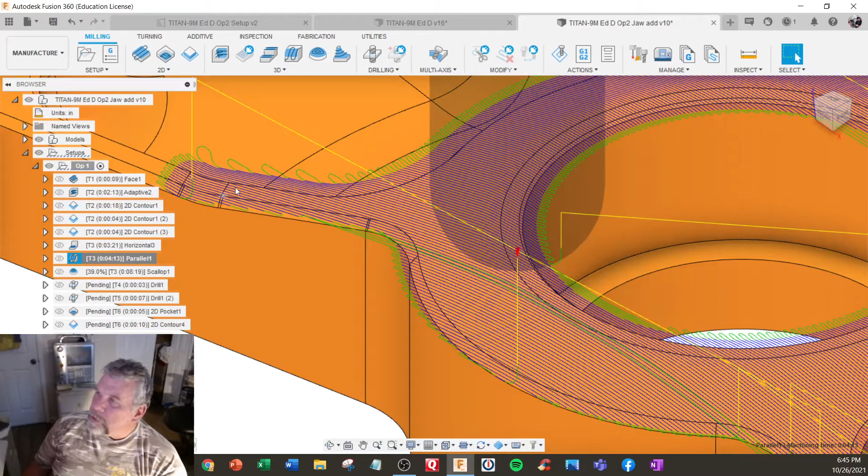Fine, but that all work. And now we're down to 4 minutes.

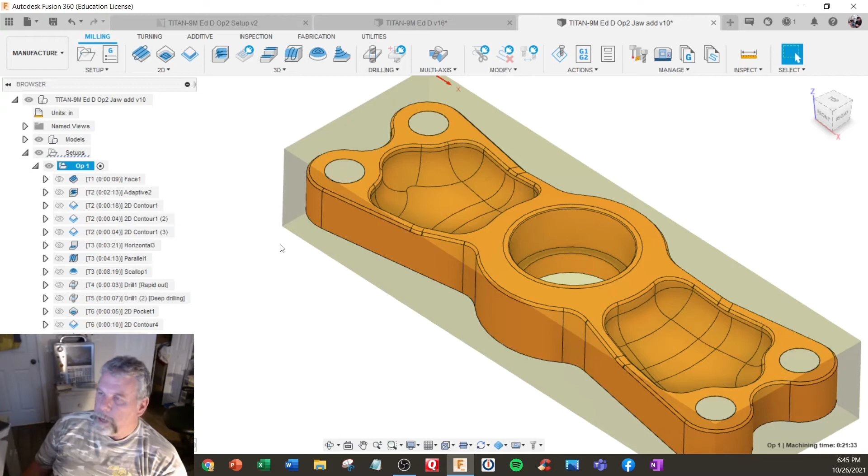On the scalloping, which is in the internal of the sculpted area, I already increased the feed rates, but on this one I already did the 10 thousandths step over. So it's going to be a matter of how the finish looks at that point. But total machining time is 21:33. So we're always trying to look at those because these could be more time consuming. We're also using trace, in the chamfering mode.

So in here, and this is also going to become important in the Titan 10M. So trace, and with the chamfer turned on, 0, and make sure you get the left compensation on that. All right.

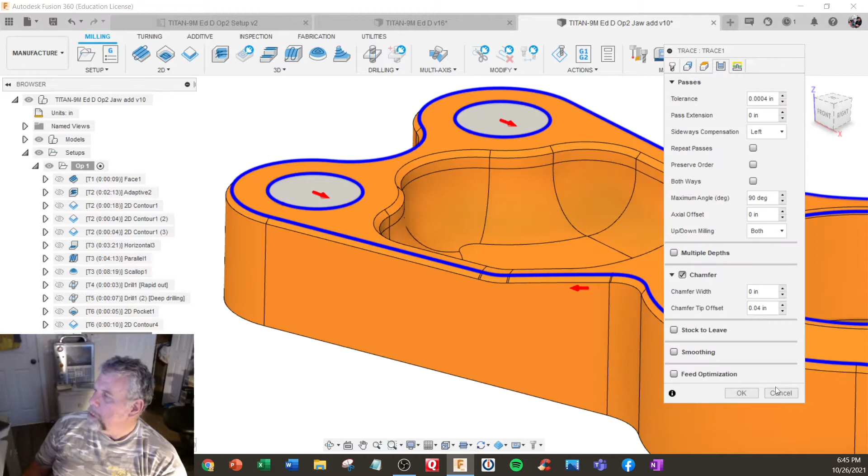Now we can go to operation 2 and use the reset new stock setting on here. So we go up here from preceding, hit OK, and yes.

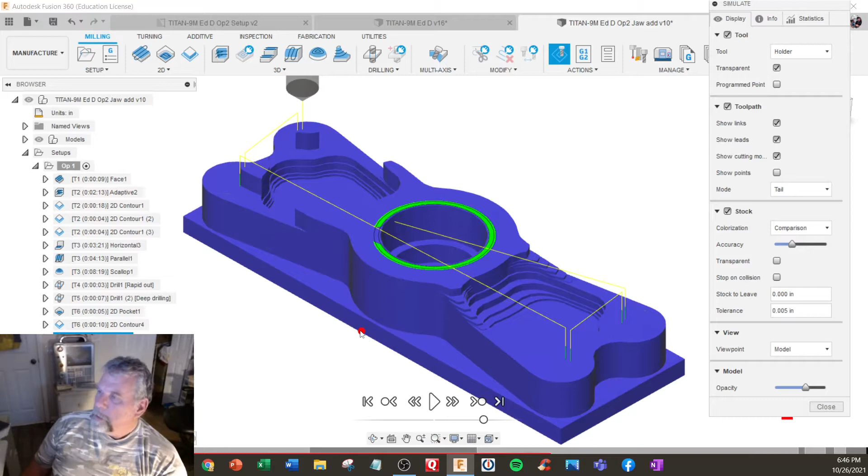I think we're still having a regeneration problem. So let me go back to an older way of doing it, which would be simulate, go to the end, let it generate. This takes a second. Now that I turned all these things down, I didn't have to be as accurate.

And almost done. When I see the holes, I know I'm at the end. Okay, so in here I'm going to do save stock, and it's going to save it as an STL file.

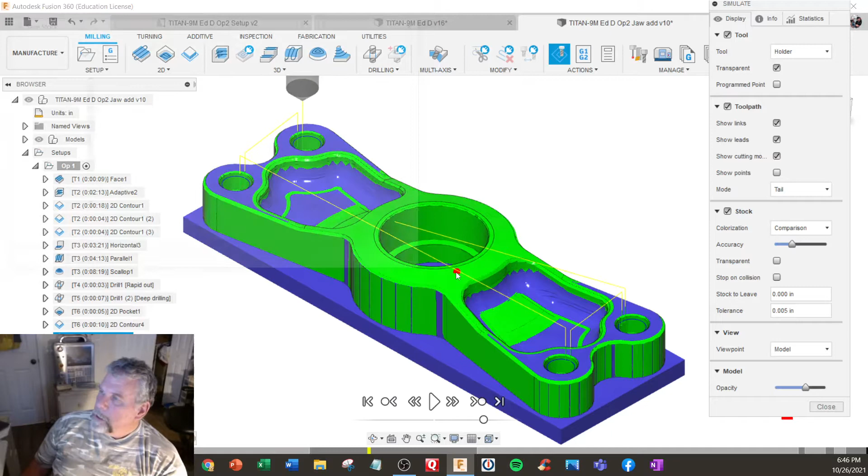I'm just going to put it on my desktop for now. Hit save. Close.

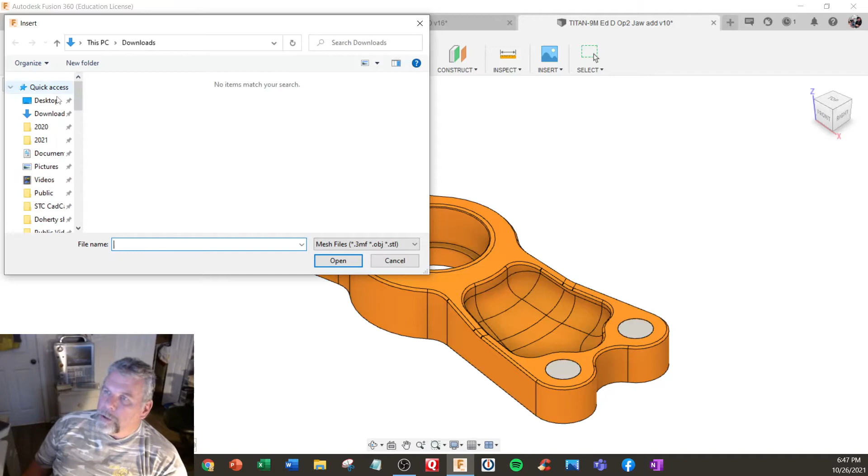And I'm going to go to the design side. Let me turn off these soft jaws, right? I'm going to insert mesh right here, and I'm going to go get that material, stock, right there, and I'm going to open it up.

Notice it's exactly the same shape. I'm importing it as inch, but let me shut it off because sometimes we have a problem with that. See how it's shrunk? So if we're working in inch, you got to import it as millimeters so it matches the size. Let me make sure I am doing this correctly.

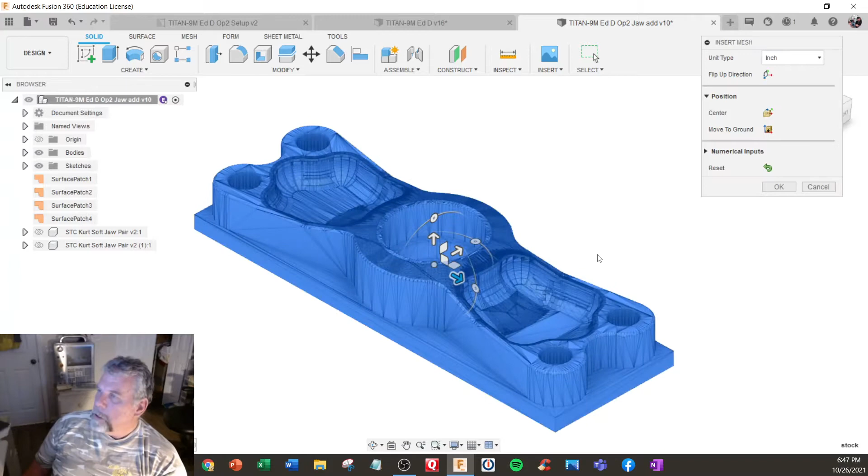Let me try this again. Insert mesh, stock, open. There it is, and that looks like the right size. I'm going to hit OK, and we turn the body on and off.

So that is now, let's see now. Oh, body 1 is, let's shut the stock off. Yeah, see how it's reduced size? So that's the problem with that. It's

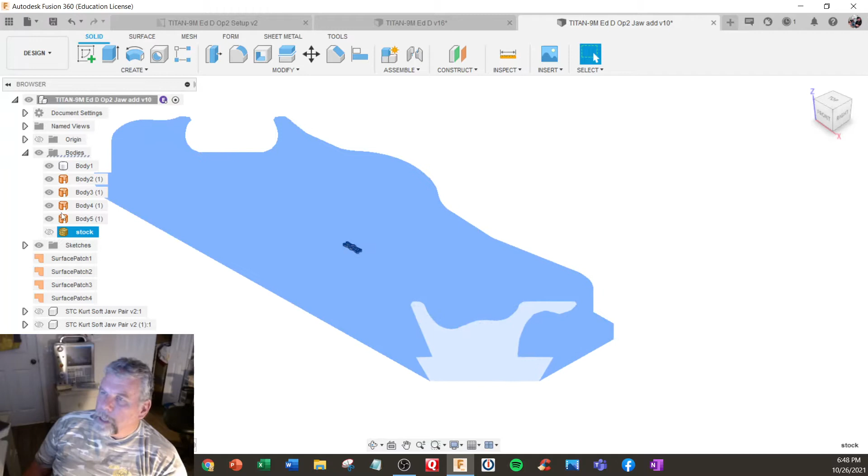not scaling correctly. I'm going to delete that one. Body, I'm going to just double click to zoom it up again. Insert mesh, get to stock again. Hit open.

And now if I turn this off, I notice how small that is. So I'm going to go to millimeter. Hit OK, and now turn on the stock. So that's actually, I don't think it's doing it correctly. Hold on. Okay, I finally got it to come in right.

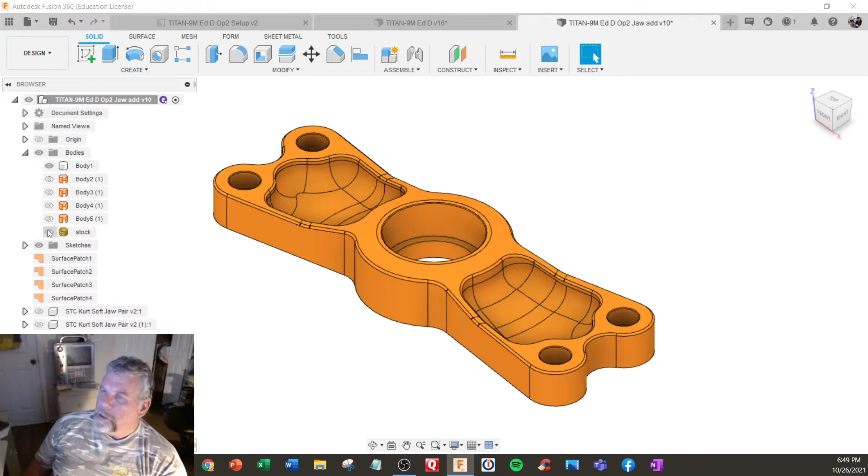So this is the original. This is what was machined. If I turn the body away, this is an STL, a stereolithography file of what is remaining. I'll turn everything back on.

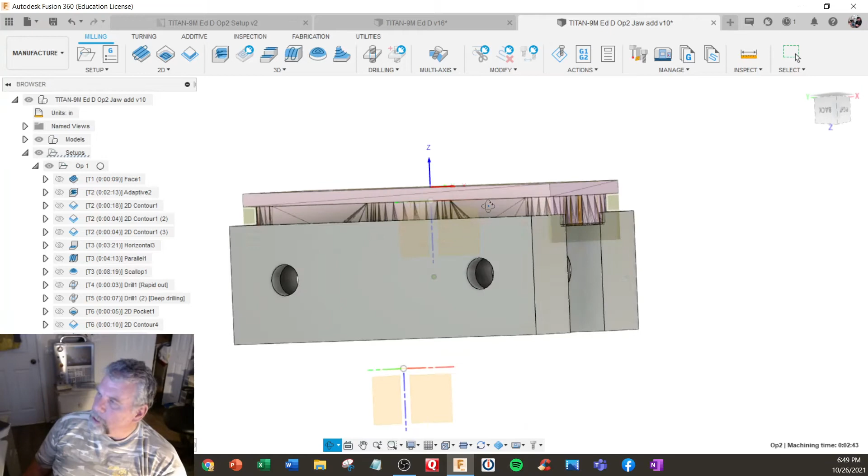I'll go back to manufacture. I'm going to go to operation 2 with the jaws, and notice it's exactly what it would look like. So I'm going to use that as my stock.

Edit stock, and instead of the preceding, I'm going to use from solid. Actually, I can just select that, or go in here and select the stock. All right, so that's identified that as our material exactly.

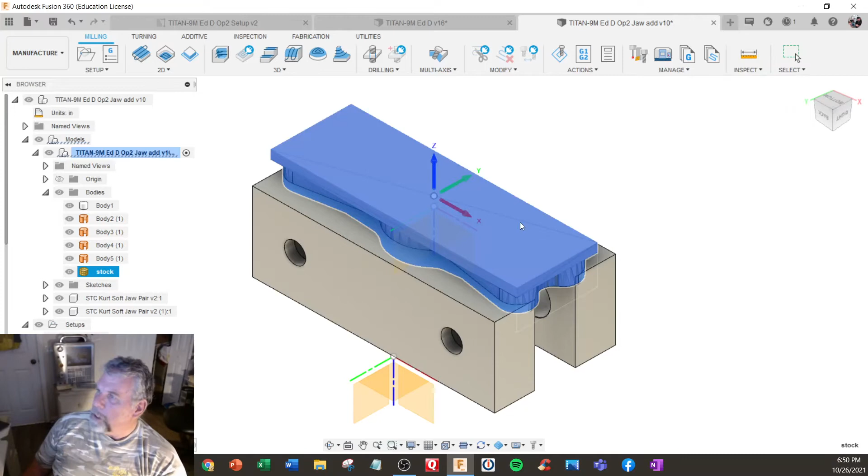I'm going to turn on operation 1 and shrink all these up. I'm going to regenerate this one. Make sure this comes out correct. All right.

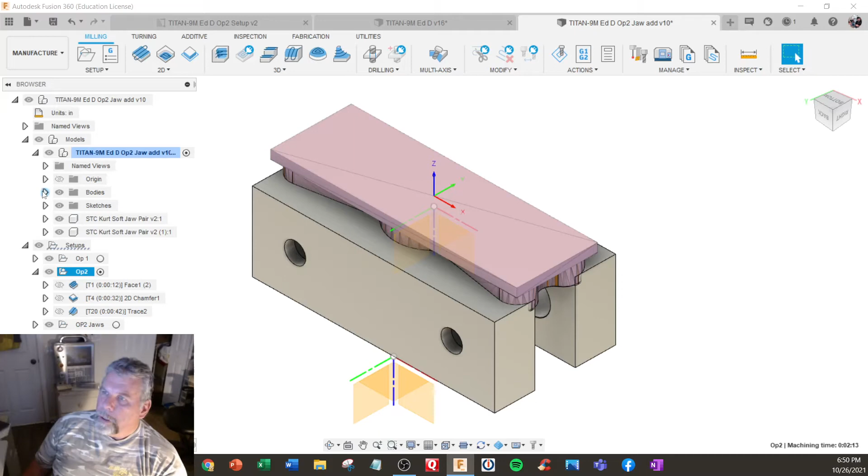Now I can actually turn that off, because this is going to be our material. Yep, looks correct. Crank that up, and we go simulate, right?

All right, we're on, let's see now, close. Operation 2 is selected. And now we can hit play. Hopefully. Close, try it again.

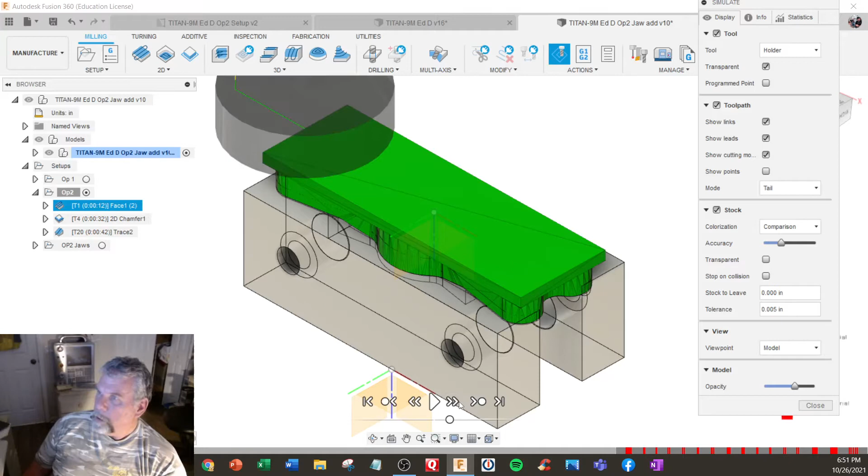We just go one move at a time. There we go, all right, first cut. Oh, that does not have multi, and we're set to the wrong location. Oh, I'm glad this, right? Let me shut off that material there.

And our 0 wants to be right on the top of this surface. So I'm going to redo my setup here. Edit to setup.

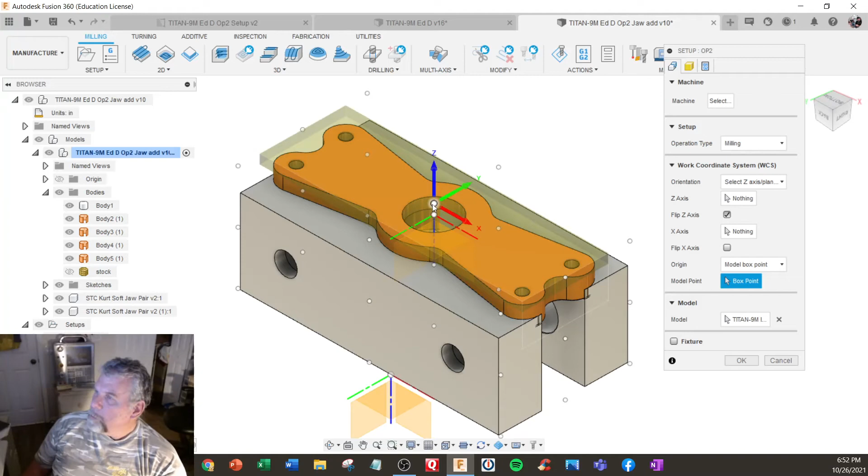Turn that stock model off. And I want to select model box point. You got to be model aligned on second operation. And I'm trying to move it from here to there. If that won't work, I'll use model origin. There we go.

Now it's totally aligned, that coordinate. Okay, I'm going to regenerate. Regenerate. Turn off that STL file.

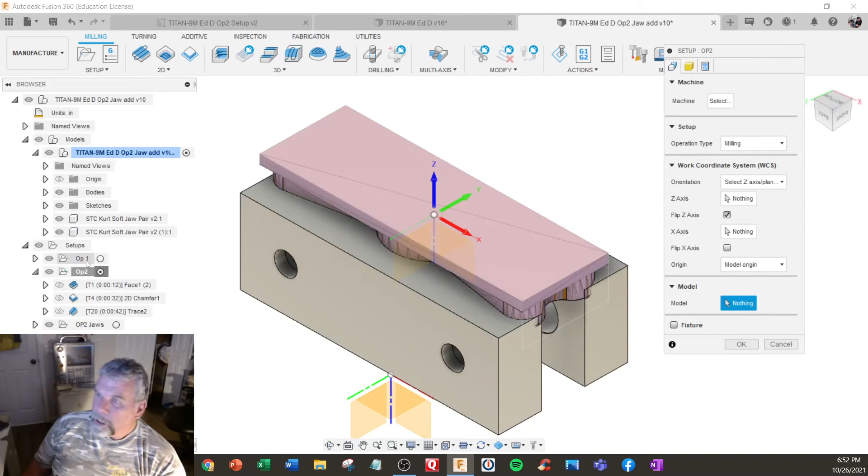And go to, I just want to edit this operation. It knows which is which. So I'm going to unselect and select the model underneath, which would be this. And hit OK. Okay, now we're all done.

I'm going to regenerate. Takes a second, and then we're going to machine. So it's simulate, right? There we go, there's our little blue hat on there. And press play.

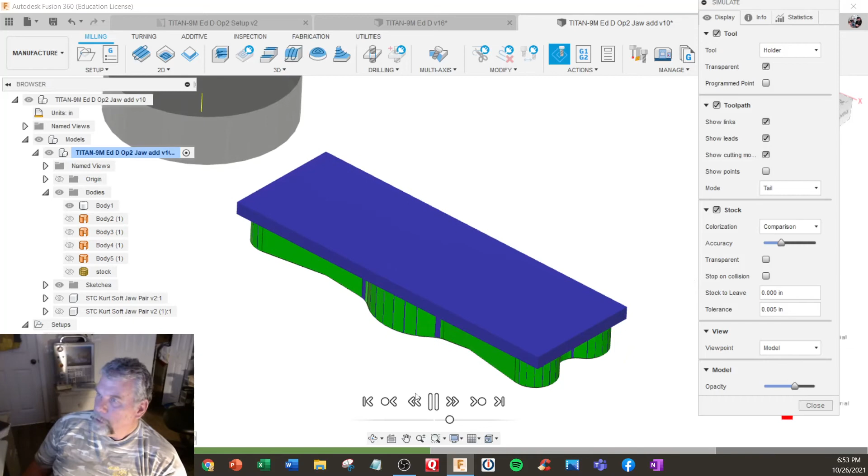And there's our tools. There it is. All right, I'm going to speed it up a little bit. There we go, cutting its way down. And we're going to chamfer, and I've actually added engraving right there.

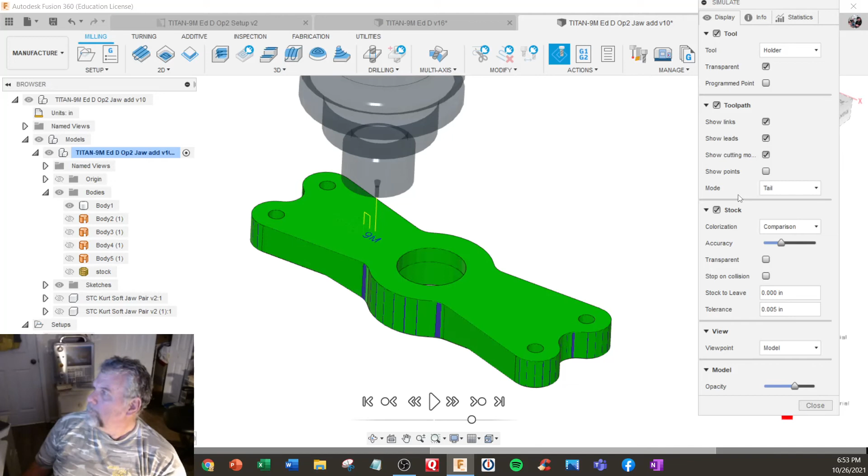Okay, let me turn on the, let's see, view model. I'm actually going to go into setup and turn on this OP2 Jaws. With simulation, I'm going to pick this jaw and that jaw. I'm going to make them visible in it. Okay, now they're going to be part of the simulation process.

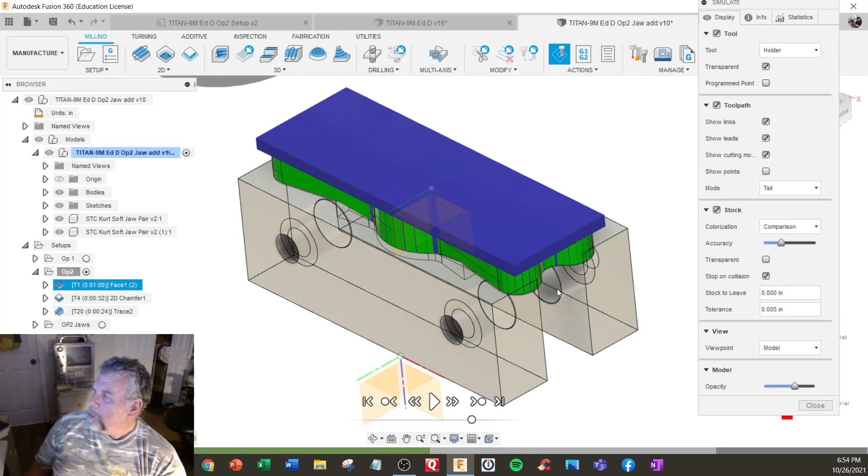And on simulate this time, I'm going to turn on stop on collision. So in case we come close to the jaws, it'll stop. All right, press play. All right, all looks good. This is exactly what's going to happen.

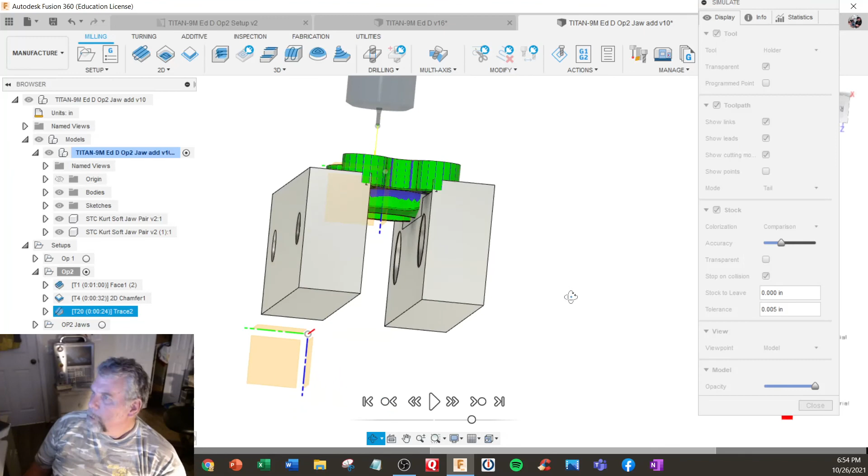So even the model of these jaws, you can change how that looks, kind of like it to look like original. So right there, these are our real setup. And notice right here, not touching here. We're only sitting on that surface.

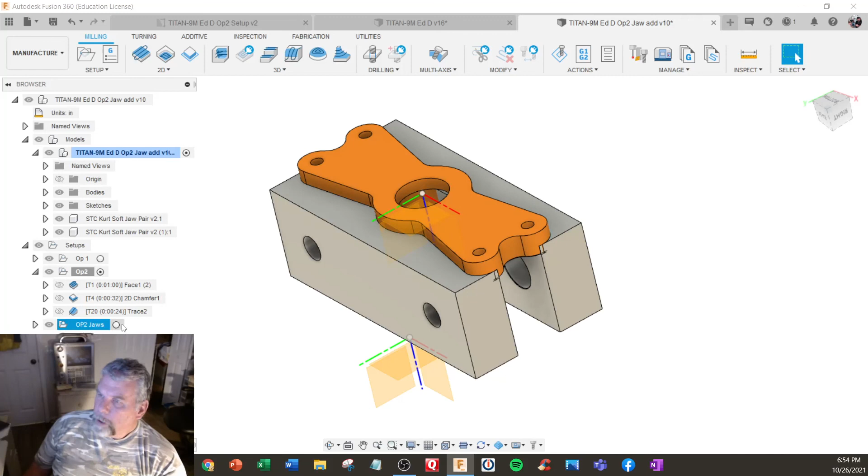Close. Okay, that pretty much wraps it up for this one. This took a little while, but we learned some stuff. We got the active sync view setup. In Operation 2, how to make the jaws, which we projected a profile. We had to do these little steps in here manually.

Where do we put these surfaces? And we just made sure this was below and not touching. We literally have the part in there. We can see that a lot better.

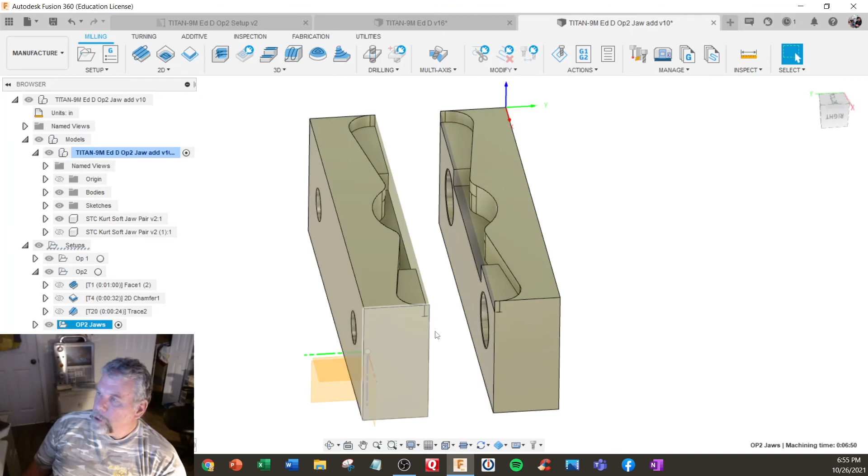And we got to know the space to put in between there. So you either simulate the space or measure in between and put a bar or something in between the clamp when you go to machine soft jaws.